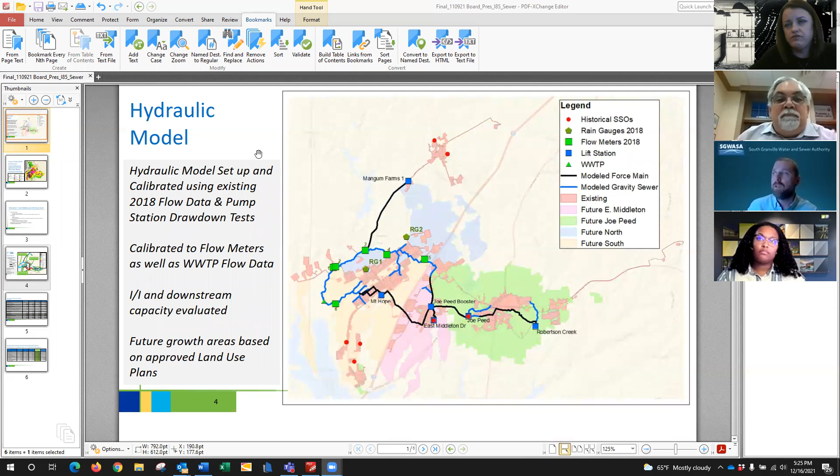This slide just shows an overall area of the model, the area that we looked at, the lift stations that were modeled. On the bottom left, that triangle is where our wastewater treatment plant is. All these squares, the green and blue squares, are primary lift stations that were used in the model. The blue and black lines are main gravity interceptor lines that were included in the model. There's really not a lot of detail to go into here, but just to kind of show you the entire area.

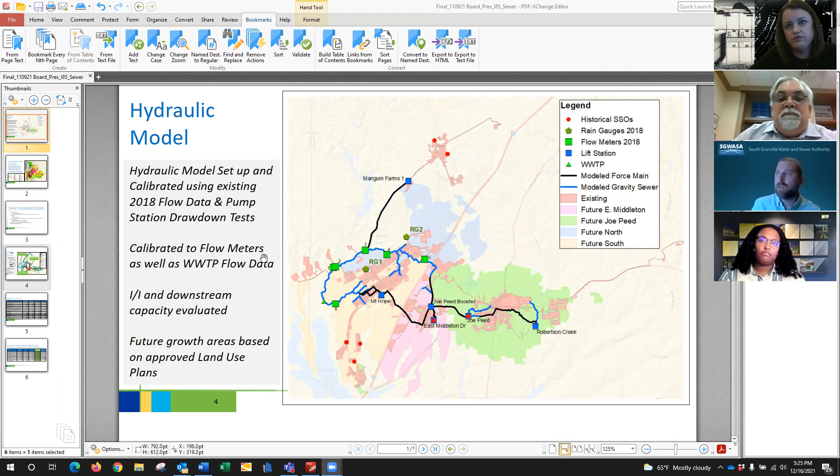We were looking at the whole service area with this. So in developing our future model, we obviously have problems today with capacity. We can't serve even the development that wants to happen today and within the next year. But we also want to plan for future growth.

So we worked closely with Mike. We looked at your future land use plans, what you anticipate future growth being, and we have projections that reach out to about 2045.

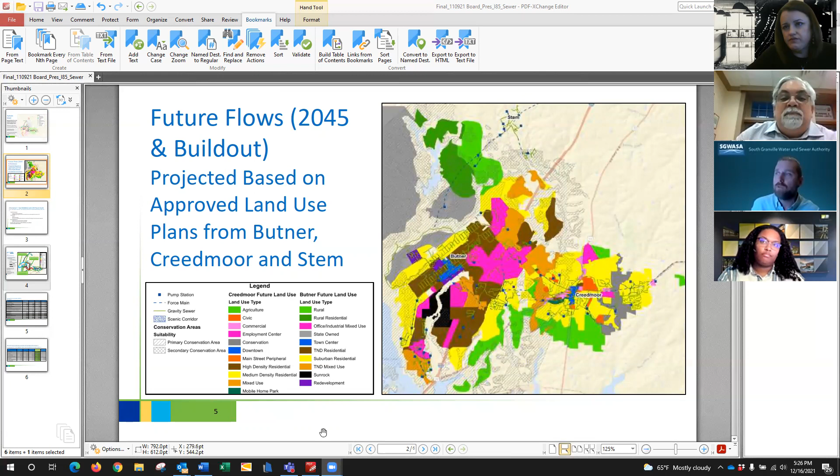You can see here, this is a map of the area that we looked at for the sewer model with the different types of uses. This was developed, like I said, with Mike's help, so Mike, we definitely appreciate that. But this future build out is what was used for us to determine what kind of sewer flows that we will have by 2045, and allowed us to plan for that future growth with our solution.

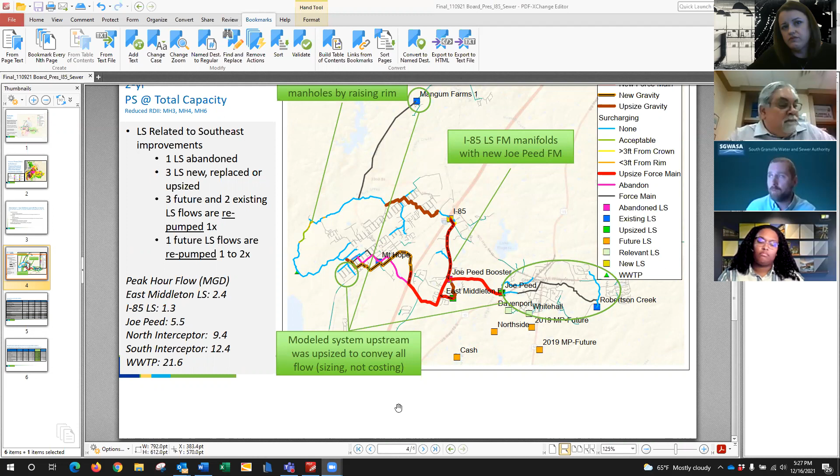This is just a summary of alternative number 5, but really what I'll do is go to this next slide. This shows the solution that was ultimately presented to our board and approved. And I say approved - we were given authority to work with CDM Smith to develop a scope and fee proposal to design and permit this.

We don't have official approval yet to proceed to that design, but we are working to develop the proposal right now. So I'll try to summarize what we've got here briefly, and if anybody has any questions, feel free to jump in and I'll try to answer what I can. This project has a couple parts.

The brown line that goes through Butner, we call that the northern interceptor. That is a portion of our northern interceptor gravity line. That really does not impact Creedmoor, but it is a very undersized sewer line that is going to be upsized. The portion that is going to affect Creedmoor is basically the rest of what you see here, the red and orange lines.

So you can see, I guess you can see my cursor - where my cursor is, that's the Joe Peed lift station. We're basically going to be constructing a brand new Joe Peed lift station and shutting down the existing lift station. We're going to be building a new East Middleton lift station, and these two will tie together.

This red line that you see here is going to be a new force main that runs from the Joe Peed lift station, and ultimately it will go west and ultimately go under I-85. We are going to have to bore under that - that's going to be a large expense, a very difficult task, but that's a requirement for the project.

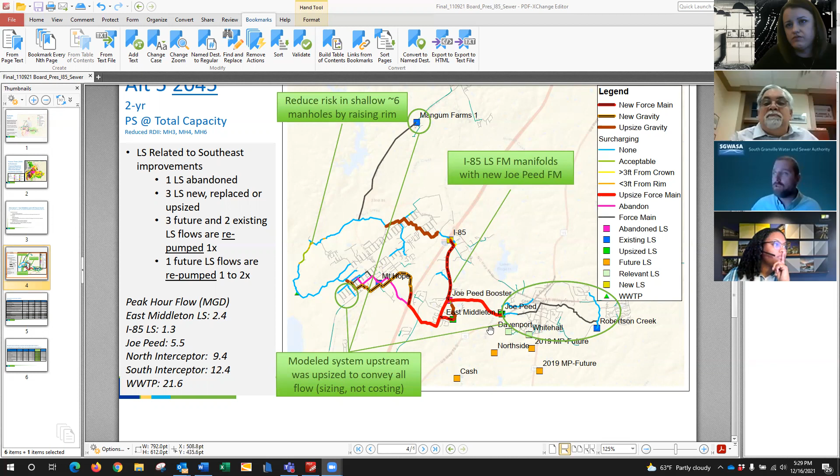All of this infrastructure you see here is based on growth projections out to 2045. This is from the slide I showed a couple slides ago that showed the different areas we worked on with Mike, the long-term projections. All this infrastructure is being designed to accommodate that growth.

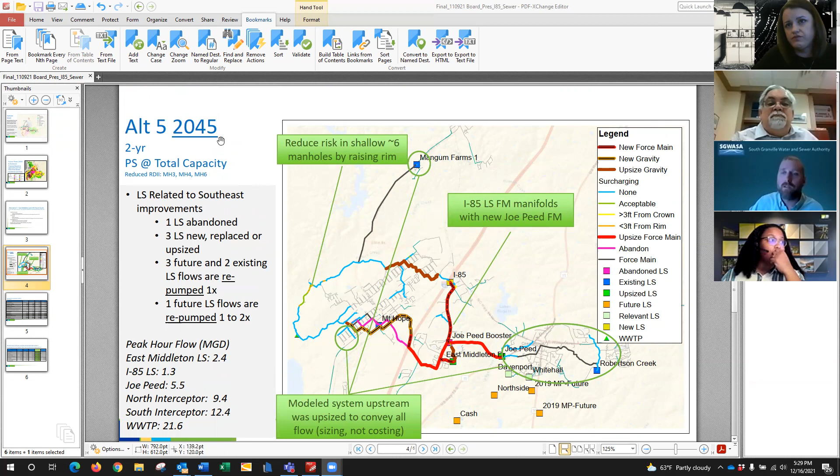So that's a summary of the project. I'll just leave this screen here. As far as the schedule and funding, it's about a $52 million project.

You may be aware that in the recently passed state budget, SGWASA was granted $35 million of infrastructure funds. That money can be used on infrastructure improvement projects—that's what it's designated for, and that's the only thing it can be used for.

Our current plan is to use that $35 million towards this $50 million project. We're also currently in talks with the Division of Water Infrastructure about some of their funds to fill the last $15 million gap, and we're talking to USDA about their funds as well, and exploring other options. The fact that we have $35 of the $50 million is very positive, and I feel this is a project that should and will happen.

As far as schedule goes, we're looking at presenting the design proposal to our board in January. Assuming we get approved at that point, we'll get under contract with our consultant. I believe we're looking at 12 to 18 months of design and permitting for this project.

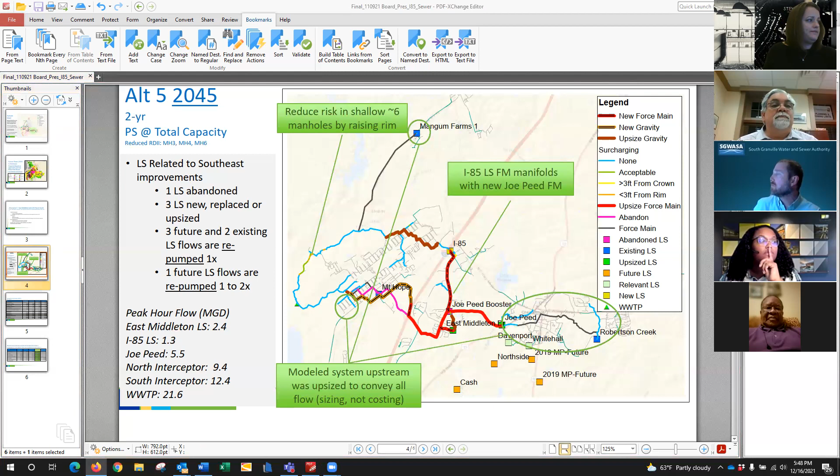Mark, do you have a map for that, or is it about the same as this map? I don't have, let's see, hold on one second. I can share GIS.

Yeah, this one pretty much applies to every water distribution line we have, right? When you talk about the model, it's got to capture every component.

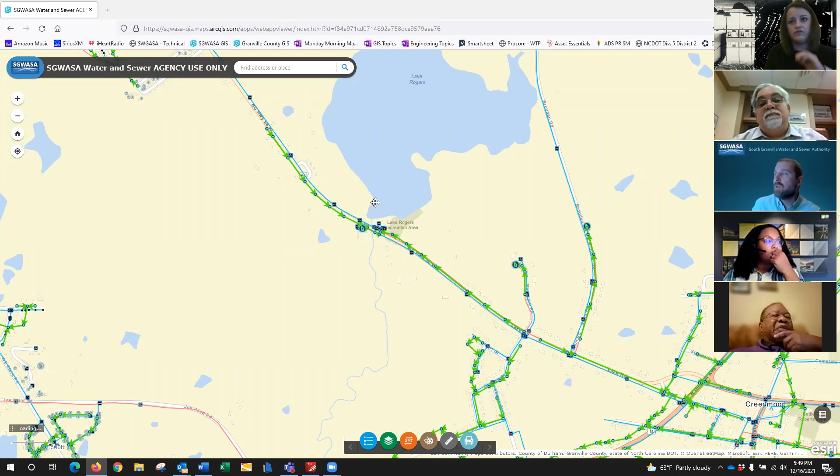Basically all the blue lines, everywhere you see - if you zoom out far enough the lines disappear and it bogs down on Zoom. But we've got water lines that run all the way out to the Wilton area. So from this water booster pump station, the model is going to cover the entire Creedmoor ETJ and our service area around Creedmoor, all the way out to Wilton. That's where the hydraulic water model is focused. We're not working on any other hydraulic water model for the rest of our service area because we wanted to focus this on Creedmoor and get that knocked out first.

So for those of you that might not be aware, one of the bigger problems we've had in Creedmoor are water quality issues. One of the solutions that have recently come up are these automatic flushing devices. In the past, we used to have to manually flush, right Mark? Where you open the hydrant and essentially just flush the water into the ditches.

I think a lot of folks who go around Creedmoor see that and wonder, why are they wasting water if it's so precious and valuable? But flushing is part of system maintenance, right? Maybe you just give us a second on why you all do that.

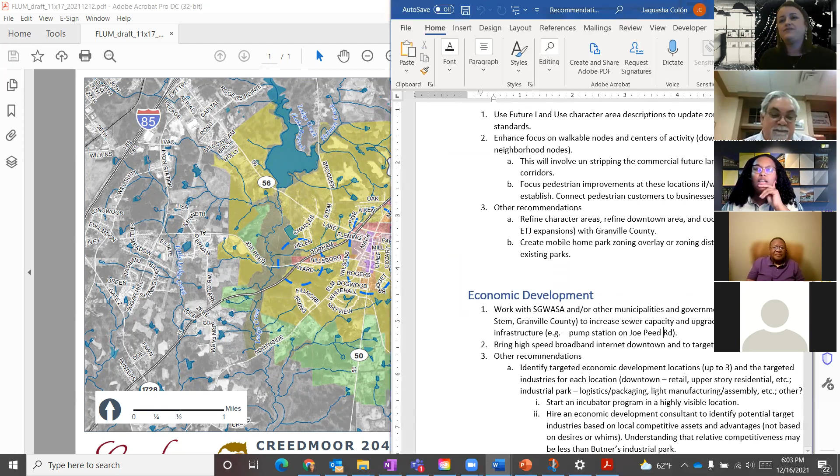So Jaquasha, do you want to take some time? I guess I can give people a little chance to look over some of these recommendations, since our group is covering downtown, future land use, and economic development. We just heard a lot from SGWASA, so we can look toward the future for a couple more development opportunities in and around downtown and on the outer edges of Creedmoor.

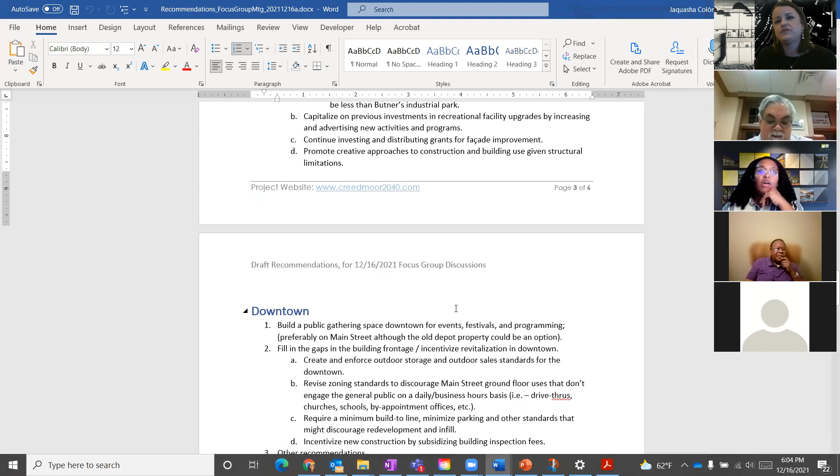I'll start with economic development since we just talked through some of that SGWASA stuff. So, working with SGWASA and other municipalities to increase sewer capacity. The second one is to bring high-speed broadband internet downtown and use that to leverage some more employment centers.

Other recommendations: identifying targeted economic locations and the industries for each location. Downtown is typically retail, upper story residential. Industrial parks are usually logistics and packaging or some sort of manufacturing and assembly. A sub recommendation there is incubator programs.

And I guess the city is already doing the economic development consultant with, was it retail strategies? That's right, that's just where I was going to go to. 3A2, hired economic development consultant. That is retail strategies. Now they are more of a commercial economic development.

They are not targeting employment centers or industrial at all. What they're trying to do is look at services, retail, different types of available amenities to people in Creedmoor. So they're not so much pounding the pavement trying to recruit major industry. They're trying to recruit uses of convenience products and services in town. But I definitely would want to become a little bit more specific on that goal to include retail strategies.

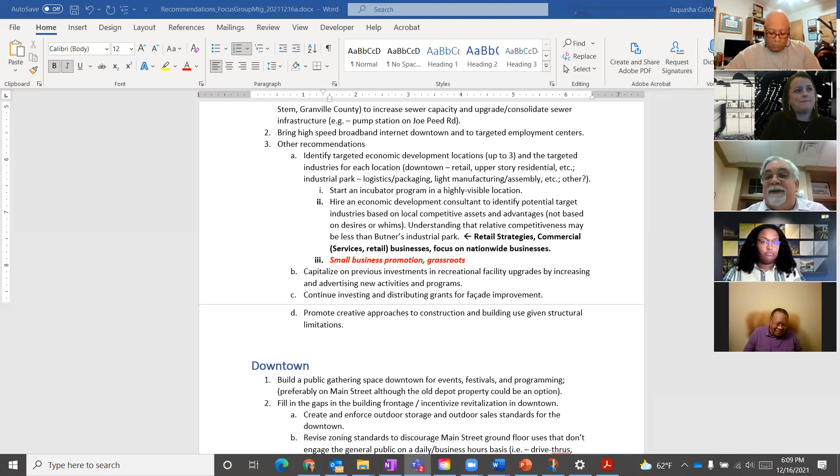So for downtown, it enjoys an exemption. New growth and development downtown, a lot of times it's already impervious surface and classified that way. So there would be less of a need for stormwater control measures, or SCMs, like wet ponds, dry ponds, or other retention. When it comes to downtown, there's a bit of an advantage because existing impervious surface doesn't have to be treated or captured.

It's when we do greenfield development downtown, taking a lot with nothing but dirt, grass, and trees and making it something else, that we increase the impervious surface and therefore have to treat it. This holds true for all development in Creedmoor city limits, the ETJ, and even beyond our ETJ in the future. All new development will have to consider every drop of stormwater that falls on it, treating, capturing, and removing nutrients. But to summarize, downtown gets an advantage and exemption for existing impervious surface, which gets calculated as part of the site plan review.

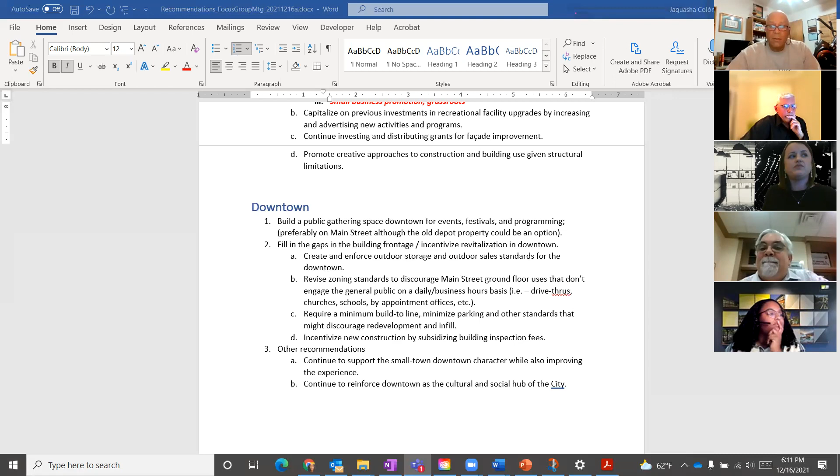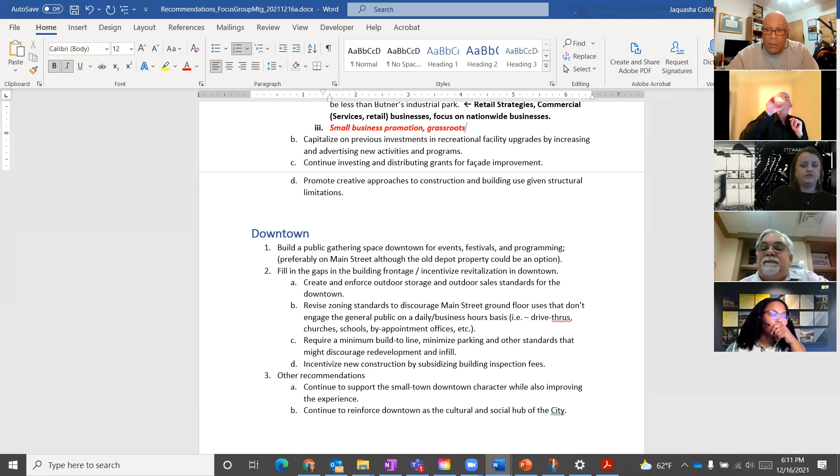Okay, thank you, sir. Mike, this goes back to what you were just speaking about, home-based businesses and the economic development piece. This is specifically related to economic development number 2, I believe, bringing high-speed internet to downtown. I continue to be hopeful we will expand that citywide, because obviously if home-based businesses are something we're looking toward, there are a ton of folks like myself who work from home, and high-speed internet is a necessity.

I happen to be fortunate in my community that we have access to it, but I'm hoping that's something we will consider looking at from a citywide perspective. So that's it for me.

Very good. I remember, sir, one of the things we discussed relates to the high-speed need and how we aren't exactly on North Carolina's broadband highway. Unfortunately, it's Highway 158 that's got the high-speed access across the northern side of the county, but we're going to find a way to get ourselves connected here. We need to keep it in our plan and be forward-thinking as broadband expansion starts to take off.

Ernie, you were next. Yeah, Daryl and I are on the same page. That was one of my comments too, because I also work from home and have trouble with Time Warner, or Spectrum now. The other thing I wanted to ask, I'm fairly new to Creedmoor, I've only been here about 4 years.

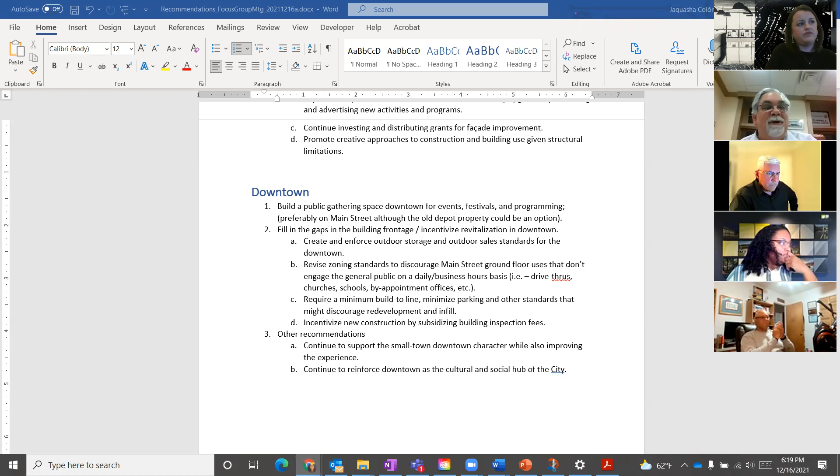Those holes that we're talking about, are any of them city owned or are they all private? They are all private, most of them, I know. No, I don't think the city owns any right on Main Street. Okay.

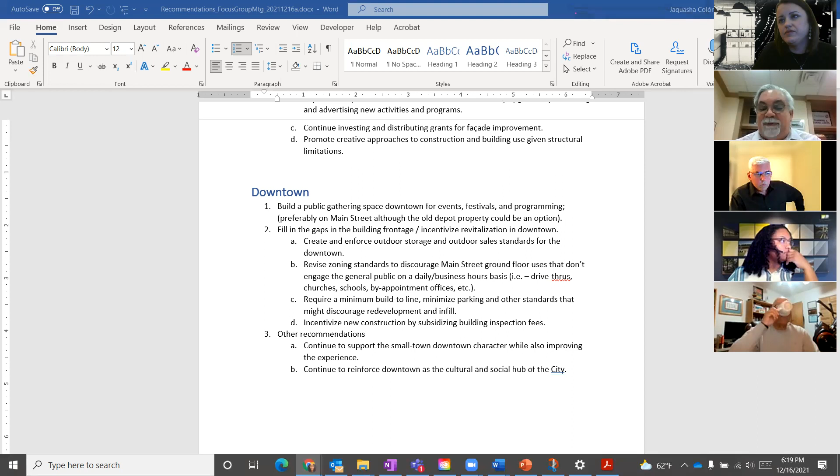There are some opportunities where we talked about partnering with some of those property owners. One of the things ADA brings up is handicap accessibility, and I know a big DE&I push is access and making sure handicapped folks get equal and easy opportunity to get up and down Main Street. One of the things right in front of Creedmoor Drug on the map that's being put in now, we all know about that little change in elevation in our sidewalks. That unfortunately is just a reality of Main Street that I don't think we're ever going to change. I could read back on maps and plans for decades that have called that out, but that's one of the only problems.

South of Campbell Orthodontics is the one that Darrell referred to as Joel's parking lot, right? Kind of where the mouse is now is where the Creedmoor Supply used to be. But that parking lot used to be a building. And then the other one, the Mexican restaurant, a little bit further north, Jaquasha, a little bit, Creedmoor Drug - those are both privately owned.

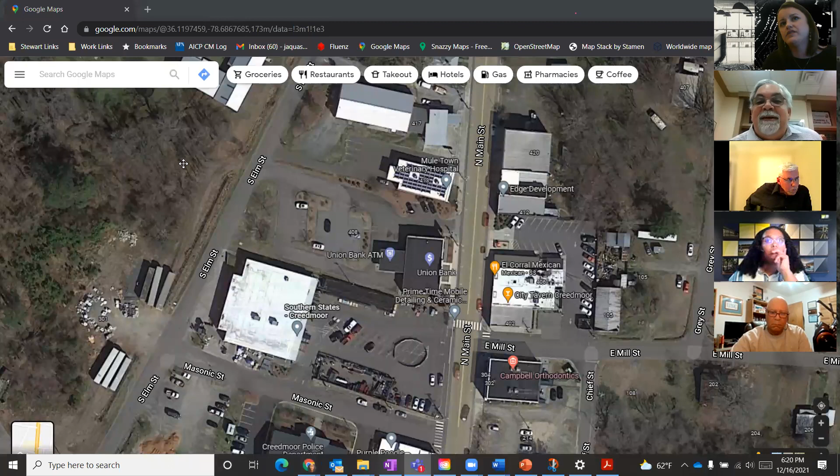Those are both Mayor Wheeler's lots and land that they own. And that one, right, El Corral, between Edge and El Corral, is where Darrell's saying the red and white was. Again, looks like parking has taken over those vacant opportunities there. And that one was recently paved. One of our steering board members, John Zabonic, is responsible for that pavement because I think he owns all that land now.

Yep. So, Mike, not to get off the topic of accessibility, but I do want to bring up the utility poles on the sidewalks. Are you able to get around them if you're in a wheelchair? There are a couple spots where it's in the middle of the sidewalk. I noted that when I was walking down it.

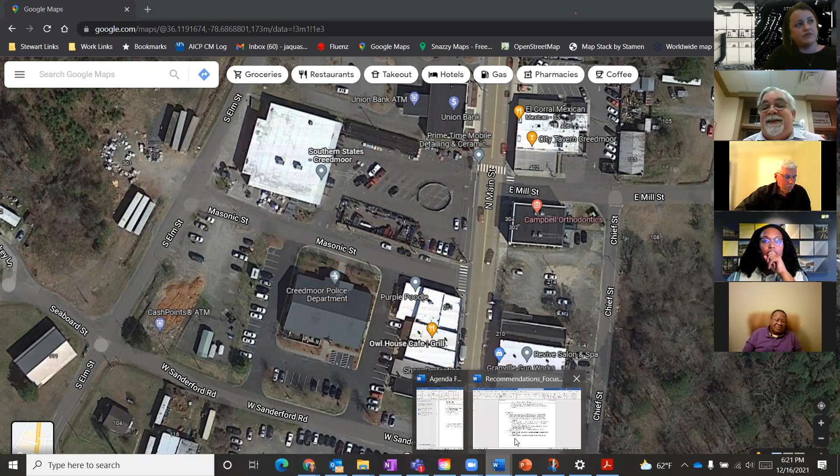That's what I meant, there are a couple. We have had sidewalk accessibility done, an ADA accessibility survey, let's call it. And I think in every area there is indeed 36 inches of clearance. But I know what you're talking about - some places those utility poles do provide a little bit of an obstacle to get around and a challenge. There are places where the ramps had to be amended so that we didn't move the pole.

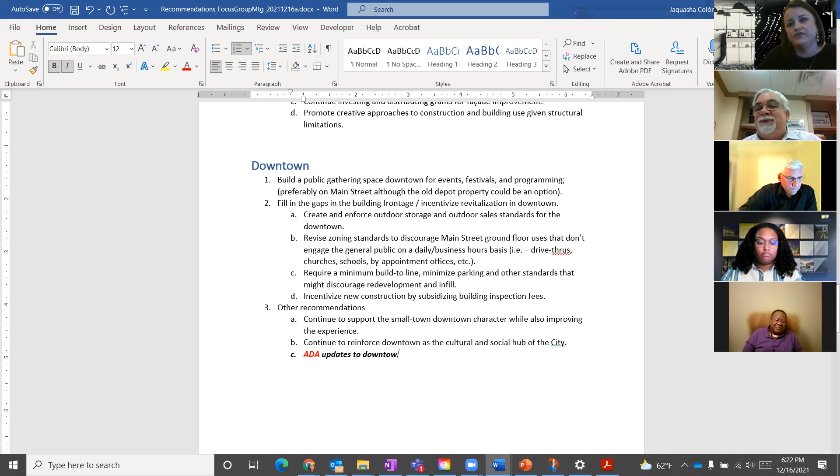Just to give everybody an idea, moving a pole starts at $15,000. And that doesn't include moving either of the three utilities that are usually on it - electric, telephone, and cable. Each of those has an expense that goes along with relocating that pole. So it is a huge, huge challenge. And I know that because we had to do three or four, I think three, as part of our Cross City Trail project. I know just how challenging they were.

It took us over a year to get one particular pole moved from one utility provider that didn't want to do what we had to do. Honestly, we got no power or control over them, but eventually they did it - took them a full year though. It is a pricey endeavor. I don't know what it will take to ever get those utilities relocated downtown. I would love to see it, and I know everybody in this group probably would. But boy, oh boy, there's going to have to be some grants on top of grants on top of grants to make that happen.